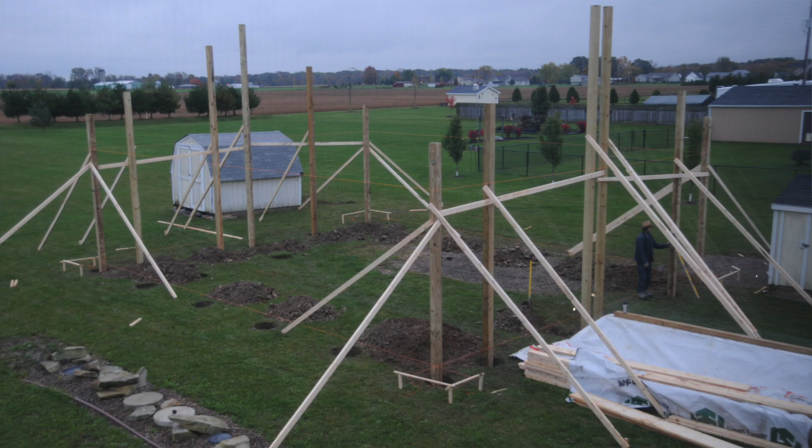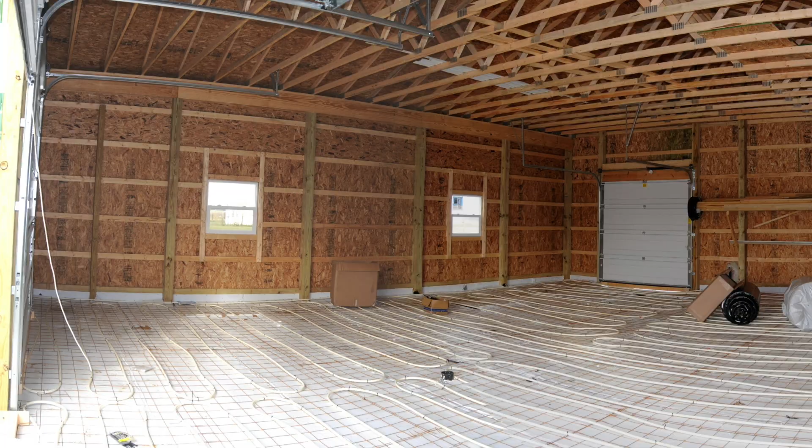I've had a couple of pole barns built over the years. The first one was a 32 by 40 shop, built by the Amish at my old place. It had a heated floor and was dirt cheap. That was back in 2010. I paid just under 15 grand for that building, and after finishing the inside, had about 20 grand in the whole thing total.

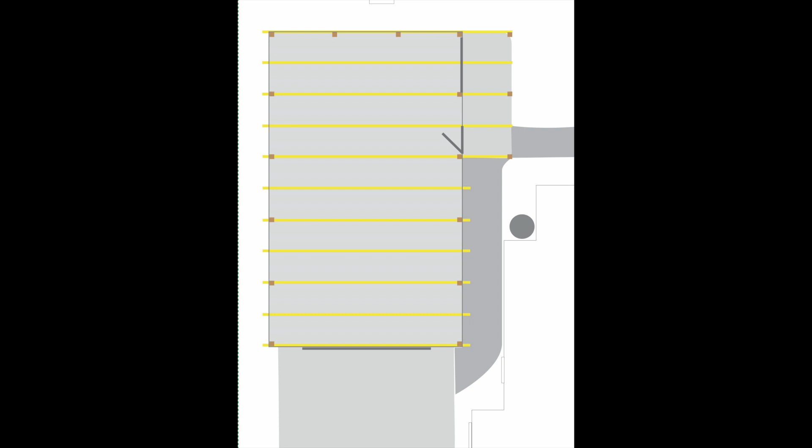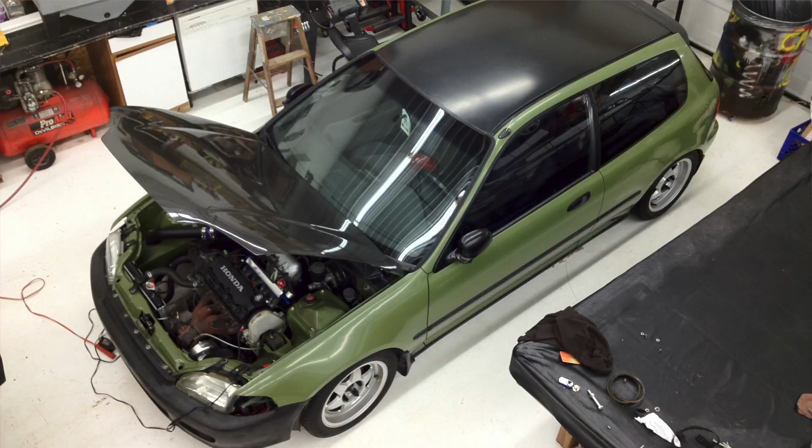I really missed that shop a lot, especially the heated floors. So after moving, I had another 24 by 40 shop built by Burkholder's Custom Construction. They did a great job, but it's more used for storage, as I do all my wrenching in the residential attached garage on the house. So it's unfinished inside. I had that built in 2020, and the total cost on that one was, I think, 26.6K.

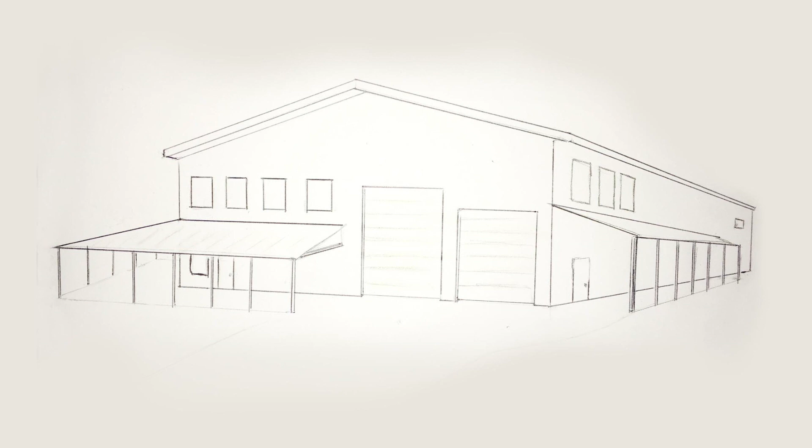I'm really fortunate to have had these buildings built, and I get so much use out of them. But sometimes I still daydream about my third and final shop. My channel is still a small fish in the world of YouTube, but someday I will need more space, and it'd be really nice to have a lift.

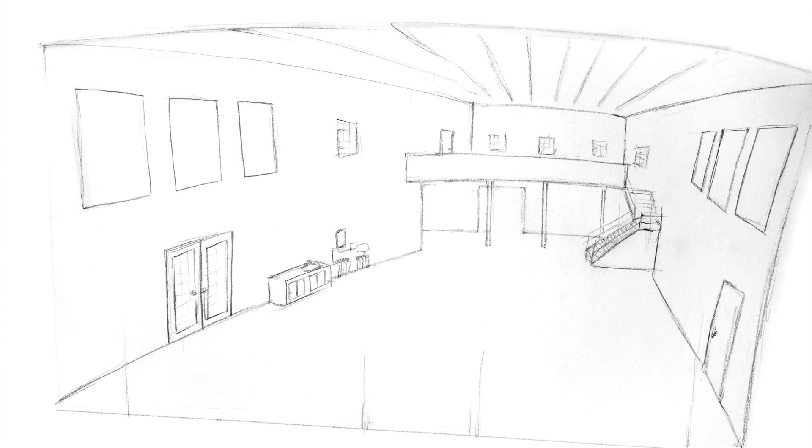So I designed a house shop slash garage condo slash barndominium slash garage house, whatever you want to call it. Basically, half house, half garage. And maybe I could realistically afford it someday, like maybe when I have a million subs or something.

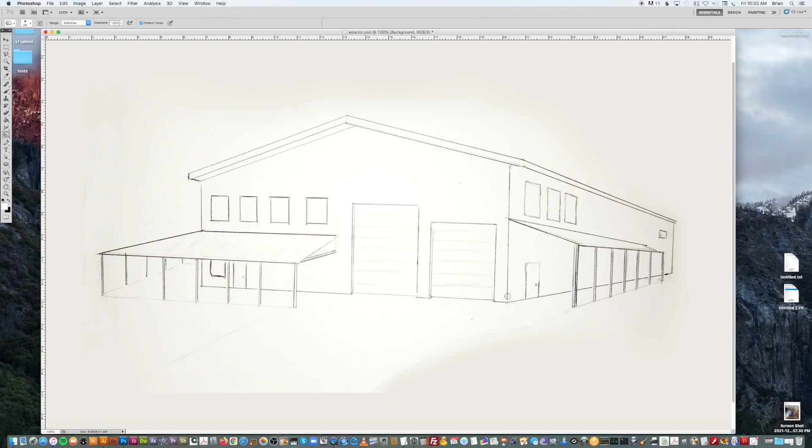So let's start with the exterior. The footprint of the building here is 72 wide by 72 deep, with 16-foot ceilings. The garage half is on the right, and the living space is over here on the left. There's a porch over here, and it's got another side area which doubles as covered parking for one vehicle. And there's a lean-to over on the right side, that's 12 feet wide.

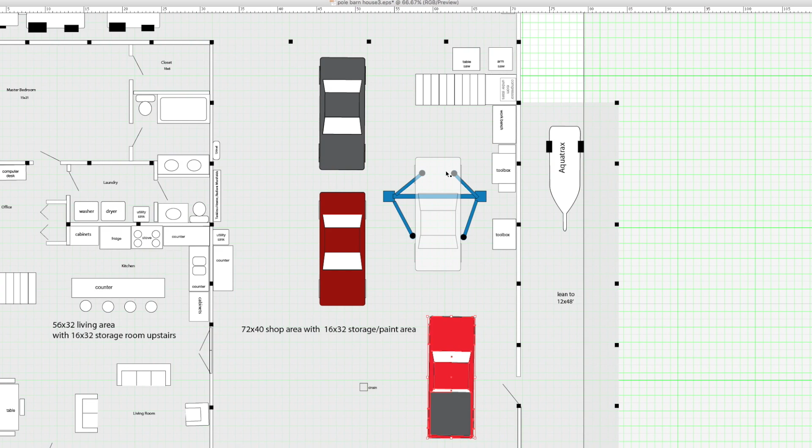Over on the right side, I'm going to have a two-post lift, and this is going to be like my main wrenching area. Over here, I'm just going to have storage for vehicles and other projects. Moving on back here, we have some stairs going up to the loft, which we'll take a look at in a little bit, and this area here is under the loft.

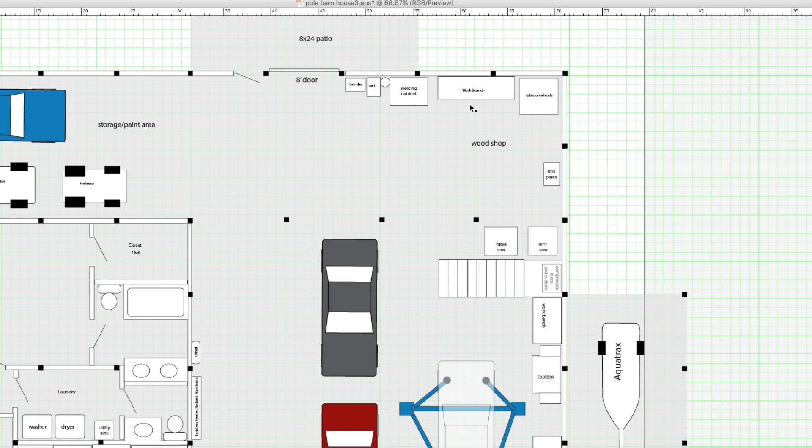Back here, I'm going to have a wood shop area with all of my saws and cutting tools and things like that. This is going to be like the dirty area of the shop. And over here, I've got welding equipment and a metal work area too. Let's get a little closer here.

Next to this area, I have an 8-foot garage door. I've got an 8 by 24-foot concrete patio out back, and I can drag the welding equipment outside, or roll the saws outside and do my really dirty work outside to help keep the garage clean.

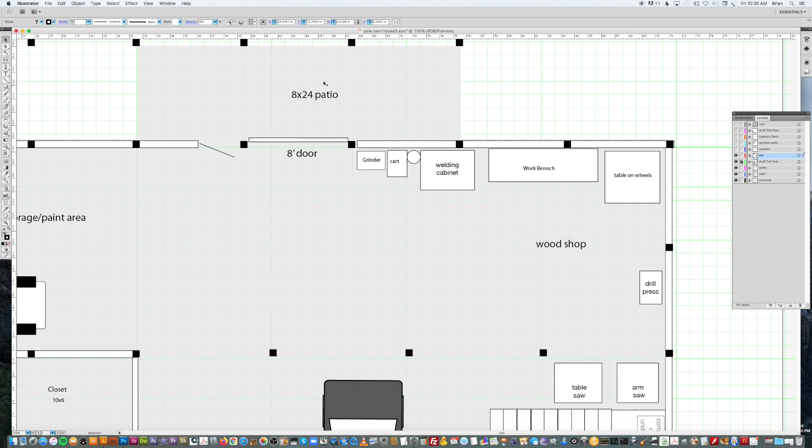Moving on this way, I've got a back area here. This is 16 by 32 feet, and it's mainly going to be used for a storage area, but it could also double as a paint area. I could put a plastic curtain across here to help keep any dust out.

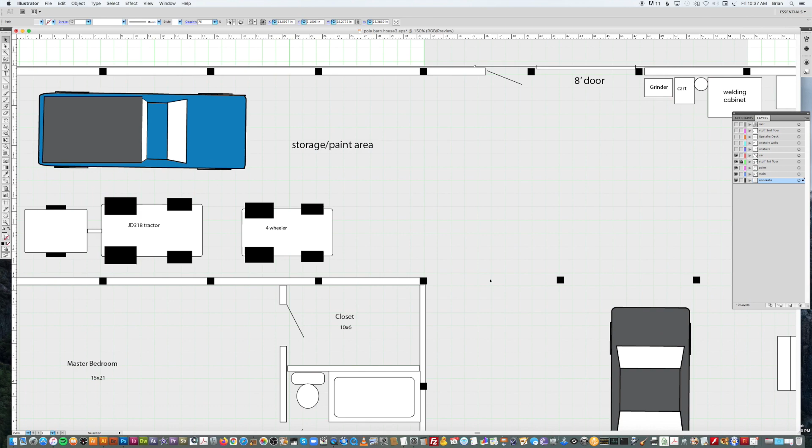So moving on around the corner here in the shop side, mandatory urinal over here on the wall. And here in the middle of the whole building is the tankless water heater and the radiant manifolds.

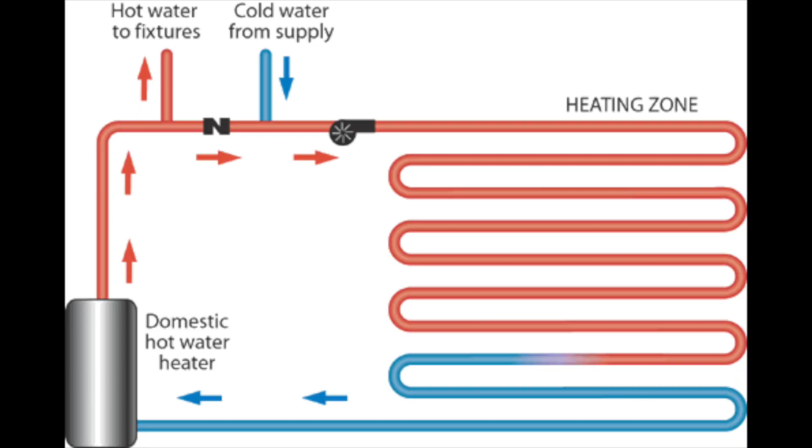I'm definitely going to go with heated floors in this shop like I had in my first building, because they are so efficient. However, in this setup, I would go with an open loop system to heat the floor with tap water instead of the closed loop system like I had before, which uses glycol.

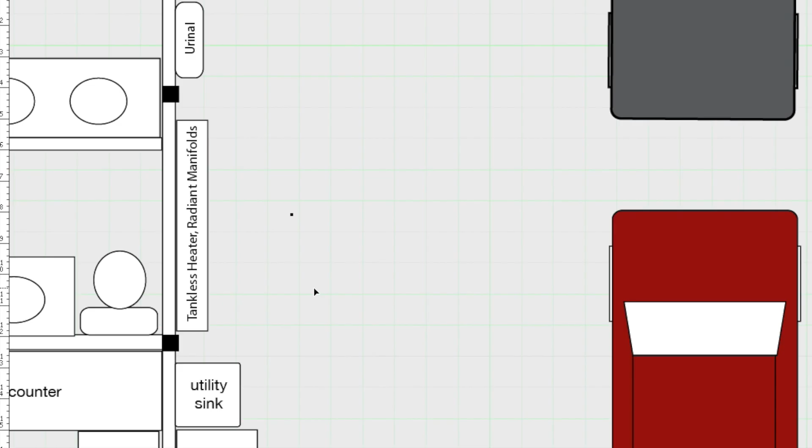My heating bills were so low in that first shop. I heated the house and the shop, and it was maybe over a couple hundred dollars twice. Now just the house I live in has an electric heat pump, and our bills easily reach $600+ in the wintertime for heating. It's ridiculous. So I definitely want the new place to have natural gas and definitely no propane, because that's not much better than the electric heat pump.

This is all in the very center of the entire floor plan, as you can see, and that's going to help with efficiency as well. So let's move on down. I've got a utility sink, a counter here, and I'll probably run a spigot over here so I can wash vehicles indoors over the floor drain.

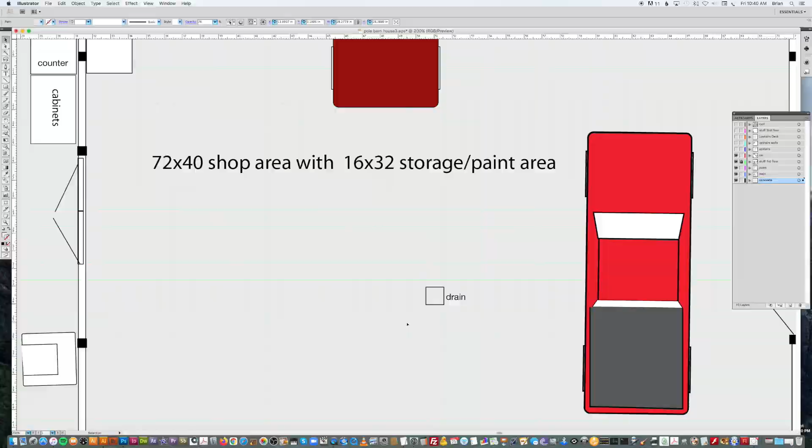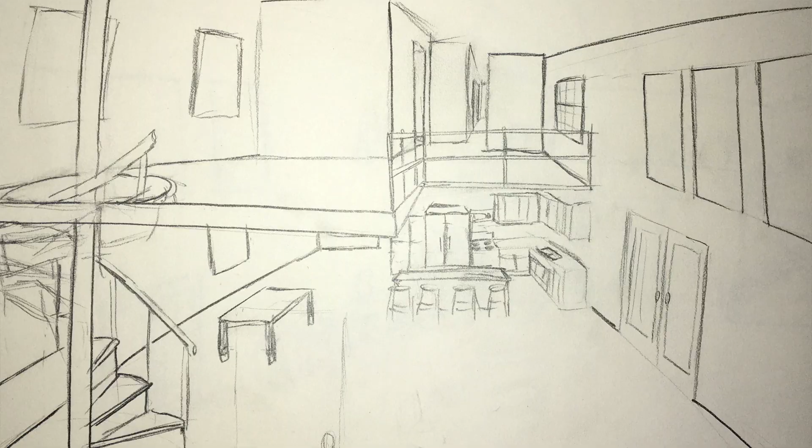Before we go over and look at the living quarters, I just want to say I built this in Adobe Illustrator. It's not at all meant to be used for architectural drawings, and I am definitely not an architect, so if you see something wrong, please let me know. I've made several revisions to this design over the past year and I'm still not 100% final. I've got a couple issues to figure out, and we'll talk about those later in the video.

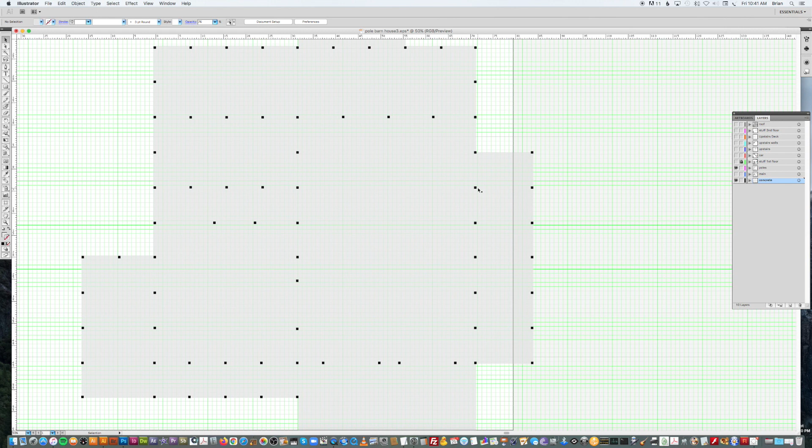By the way, I designed this as a pole barn, and you see these little black squares throughout the place — those are the poles. And here's the concrete pad. These poles are spaced 8 feet apart, and each one is 6 by 6. I have experience designing pole buildings and I've seen a couple built. If it makes more sense to build something like this on a traditional foundation with studded walls, or even a steel building, let me know, because that's not something I have much experience with. So onto the living area.

On the front of the building, you're going to have a big front patio along with an extension on the patio, which can double as a carport. In the middle of winter, I don't want to be opening and closing that big door all the time and letting cold air into the shop, so it would be nice to have some outside parking to help keep the heat inside.

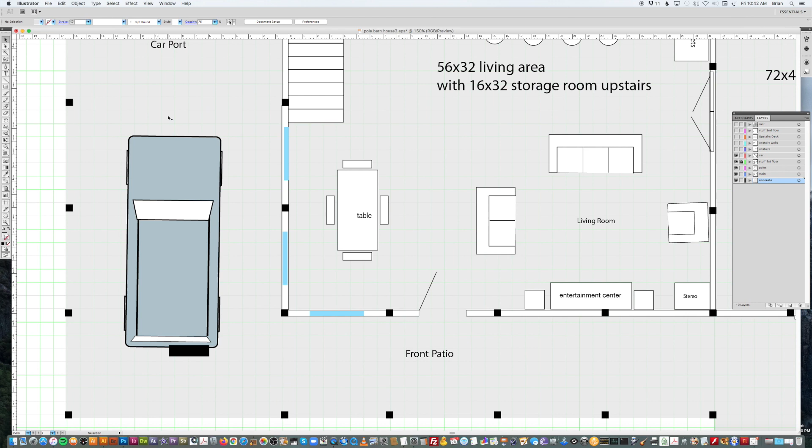Once you enter the front door, you have all these blue things here — these are windows to the outside. Over here on the right is a living area, over here on the left is a dining area, and after the living area is a set of French doors to enter the shop.

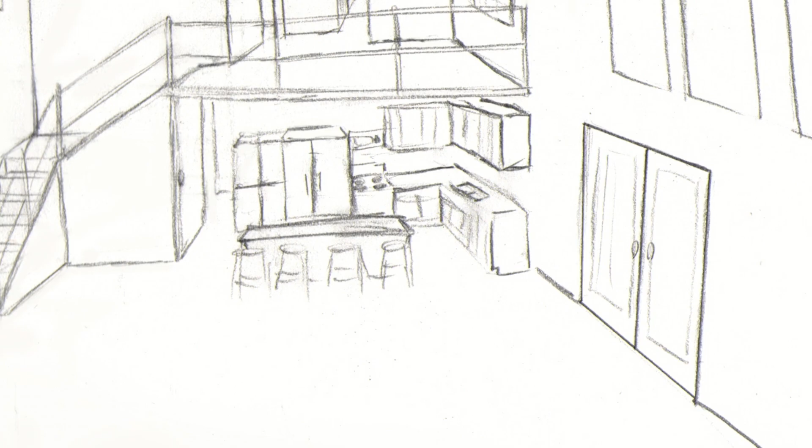Moving on toward the back, we have a kitchen island, and over on this side are stairs that go up to the loft, which we'll take a look at in a minute. Right here underneath the steps, there's going to be a small closet for things like coats and whatnot — just a little bit of storage, going back underneath the steps.

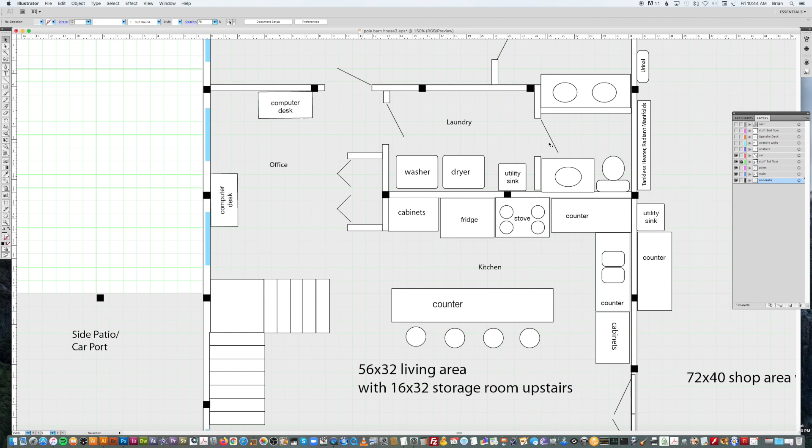Moving on back here, this is going to be a closet, which will probably be used more as a pantry. Over here is going to be my office slash work area, where I'll be doing all my video editing. Across from that, around the pantry, is going to be a laundry room with my utilities and a sink, probably some storage shelving or something like that. And through that is going to be a small half bath.

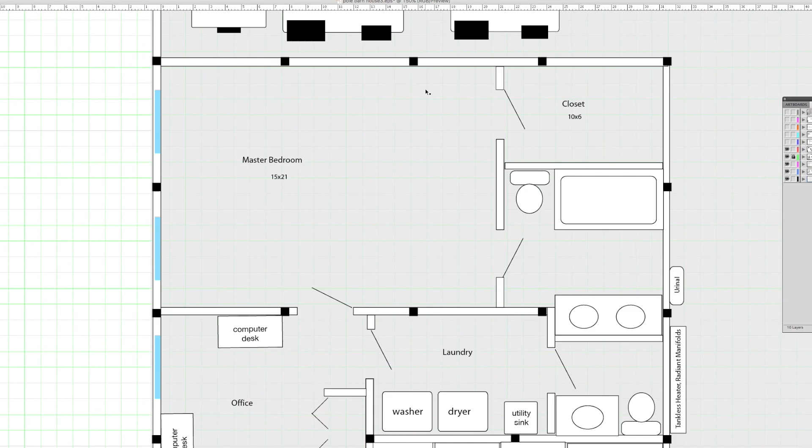Let's move on farther back to the master bedroom. Now this is much larger than I actually wanted, but being a pole barn, all the poles are based on 8 feet, so you kind of have multiples of 8 to work with. The master bedroom is 15 by 21, and on one side there's a full bathroom, and on the other side is a 10 by 6 walk-in closet. Notice everything that's going to use water here is as close as possible to the tankless heater.

That's going to help your hot water get to your washer, dryer, sink, shower, whatever faster than if it were on the other side of the house, and also save on plumbing.

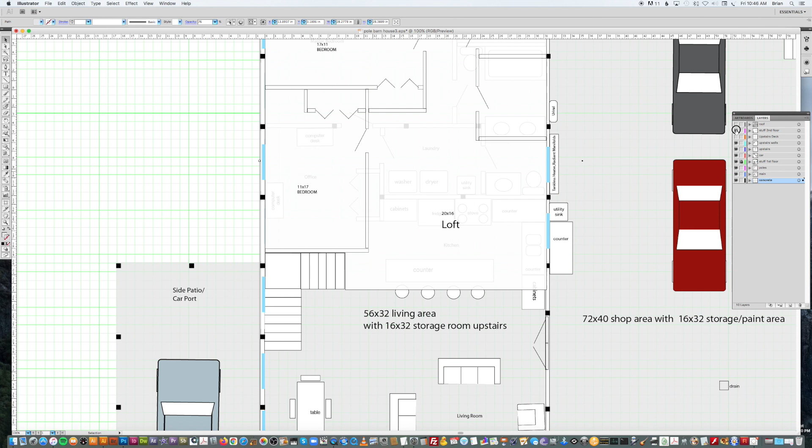Let's zoom out a little bit and turn on the upstairs. Walls, some stuff on the second floor. You go up to the loft here, past the landing on the steps, and upstairs you're going to have a 20 by 16 loft, just a big open area. I think it'd be cool to have a couple windows looking down into the shop — makes for some nice viewing angles for videos.

The first bedroom is not quite 11 by 17 because I had to cut some out for a closet. So there's a first bedroom, and around the corner is another bedroom, a true 11 by 17 with the closet on the outside. Across from that is a full bathroom.

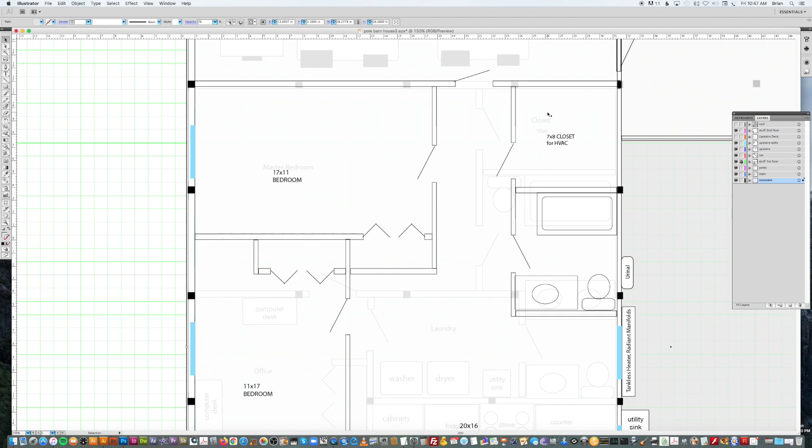Next to that I've got a 7 by 8 closet, which I sectioned off for HVAC purposes. There's definitely going to need to be some air conditioning because Ohio summers get pretty hot. I'm also not sure, but I may need some sort of heat setup for the second floor in winter — not sure if just the radiant heat from the first floor will be enough. I need to do more research on that, so if you have any thoughts, let me know.

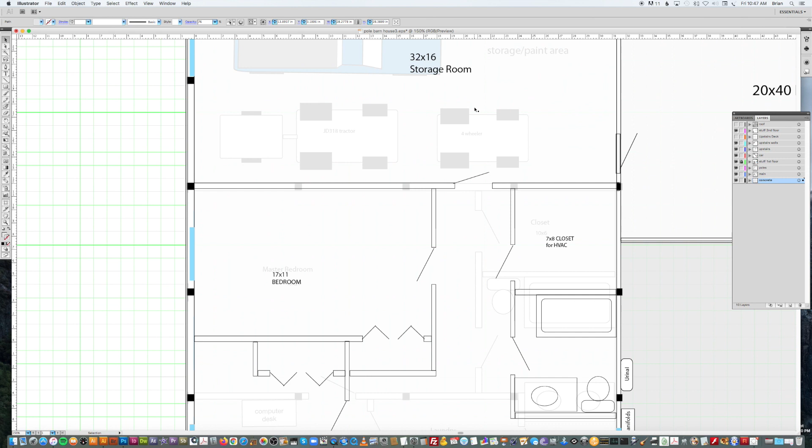Going through this door at the end of the hallway is a giant 32 by 16 storage room. Since this garage shop house has no basement, I have nowhere to put my photo studio, all my Toyota parts, or all my wheels.

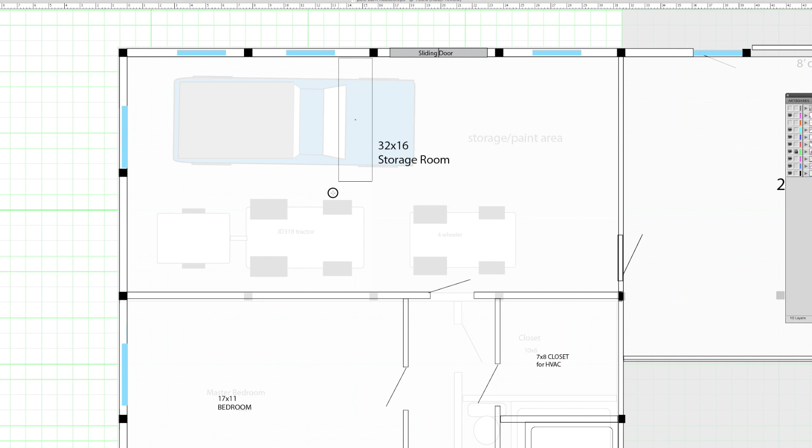So I just need a giant room to make up for not having a basement. A room this large could also be converted into two additional bedrooms — say you put in a hallway right here, with one bedroom here and another over here. Because I'm going to have my HVAC right here, I could easily run ductwork through here into these additional rooms. And this door here leads over to the shop loft.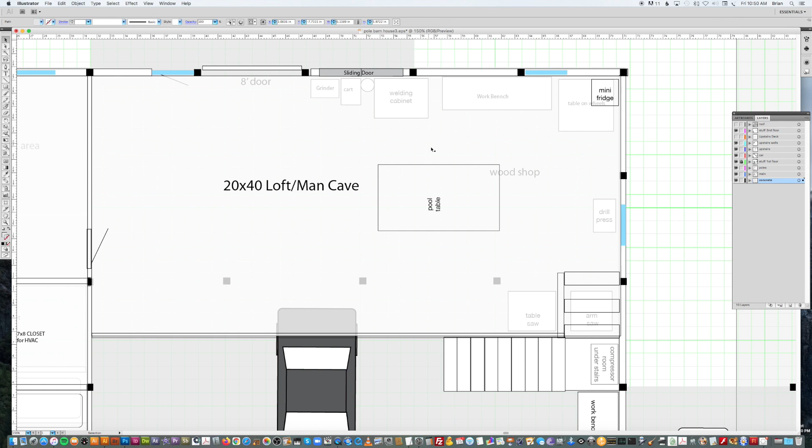Let's go check out the man cave. This is going to be the 20 by 40 loft that the stairs lead up to. Up here I'll have a pool table — I really missed having one — plus a fridge, probably a bar, just a chill area.

Oh, I forgot about the deck. Let me zoom out and turn on the deck. Outside, out back here, there will be a 10 by 42 foot deck over that patio. And over here I'm going to have a sliding door to get to the deck from the man cave as well as from the storage room.

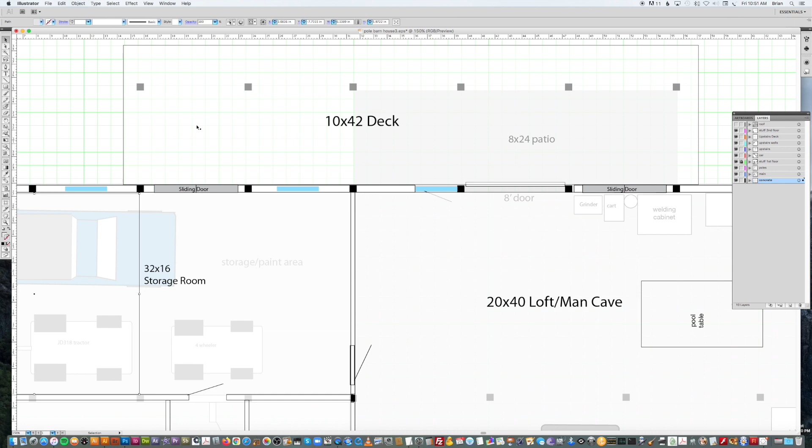Getting back to this loft in the shop — the loft slash man cave could also be heated and cooled because I'm going to have my HVAC closet right here. I could easily run ductwork through the wall to heat and cool this entire area. Of course, that would mean separating it from the rest of the shop, which I could do with a whole row of windows to keep it feeling open and airy, and even a glass door over here.

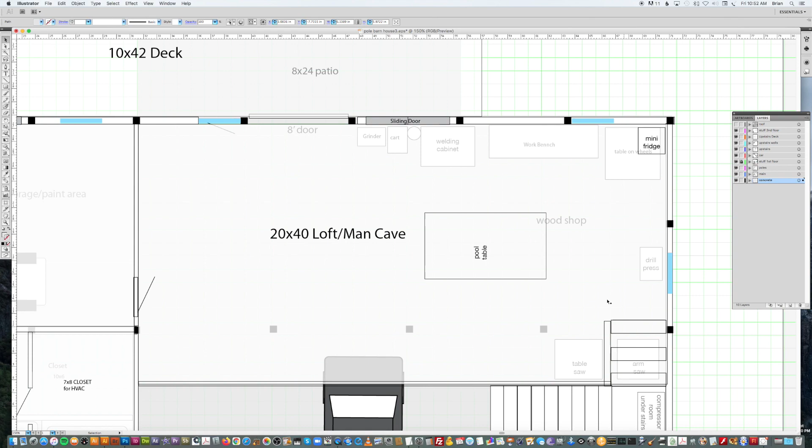But that could be down the road. I think it's going to be hot up at the top of the shop — there'll probably be a lot of heat up there, and I don't know if just having windows open would be enough to keep it cool.

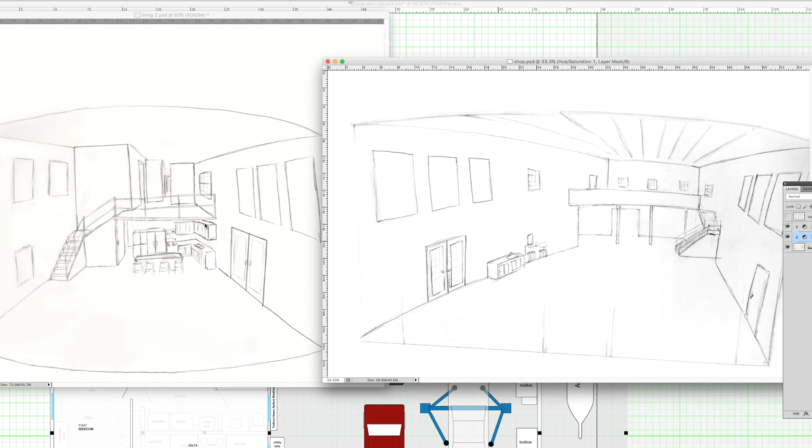So I mentioned earlier I had a couple small issues with the layout I haven't figured out yet. The first one, the biggest I think, was the upstairs ceiling height. I assumed with 16-foot ceilings each level would be 8 feet, but I didn't account for the floor joists, which might be about a foot thick, leaving me with 7 feet upstairs. That's a pretty low ceiling, and I like high ceilings.

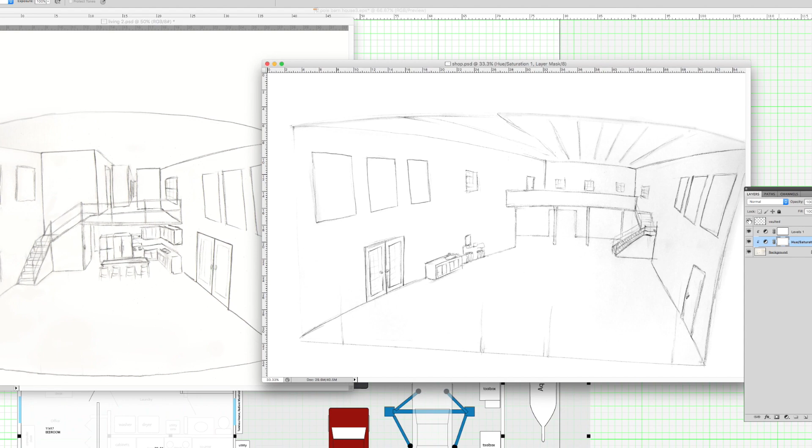So what I could do is use a scissor truss, and that would give me a vaulted ceiling. So something on the shop side would look more like this, which would give me a lot more room up in the loft. I could even extend some of these windows going between the shop and the house and make those taller. By the way, these aren't designed to open, they're just to let light through. But I definitely want this window to open so I can set up a camera and see down through.

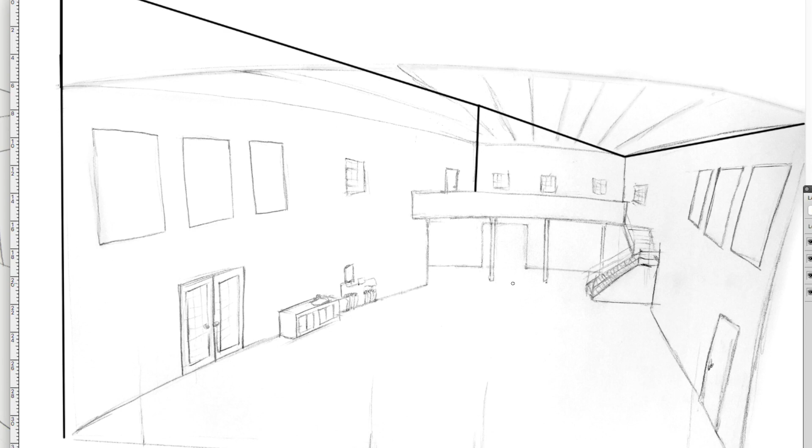But over on the living side, that would look more like this. By the way, I tried to draw these with a fisheye view to get more perspective. This is all done freehand. Like I said, there's no software here, so it may not be to scale.

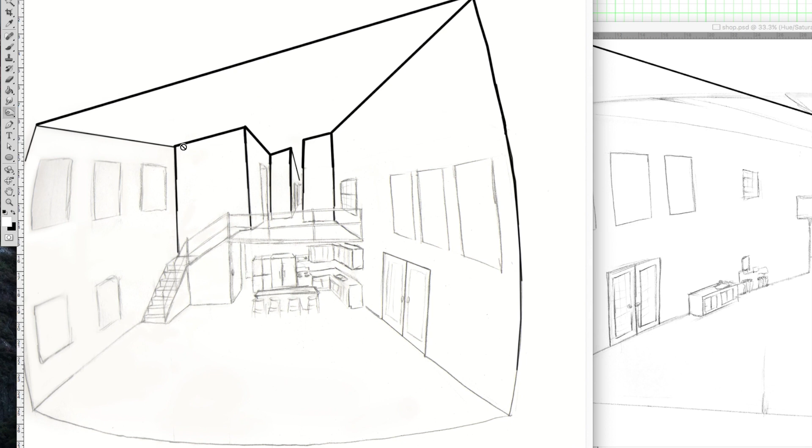But I think that a tall ceiling is going to solve that issue. Yeah, you're going to have 7 feet over here, but that's not a huge issue because it's just one small area in those bedrooms. You'll have 7 feet right here walking up, but after that, it won't feel so claustrophobic. Plus, with all that additional ceiling height, that will leave room for some ductwork.

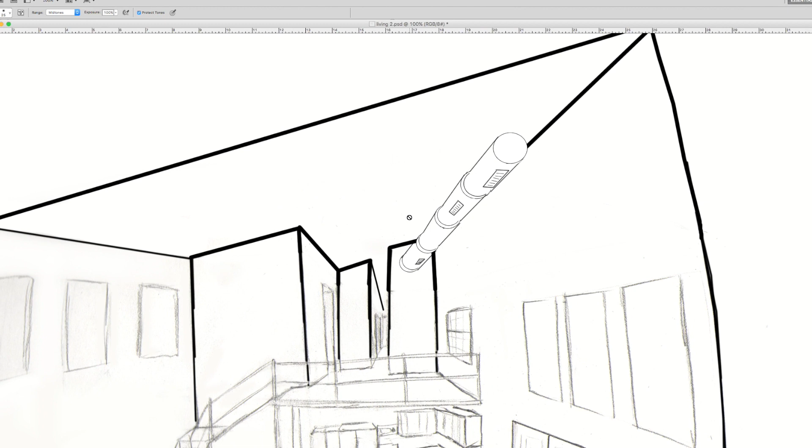Let's zoom in here. If you look at the ceilings in a lot of restaurants and bars, they have these big industrial tubes coming through to help cool, and they start bigger and shrink down smaller and smaller as they go out. I think that'd be kind of cool. I'm kind of going for a contemporary feel inside the place, maybe a little industrial, but I think that would be sufficient to cool this whole downstairs area on a hot day.

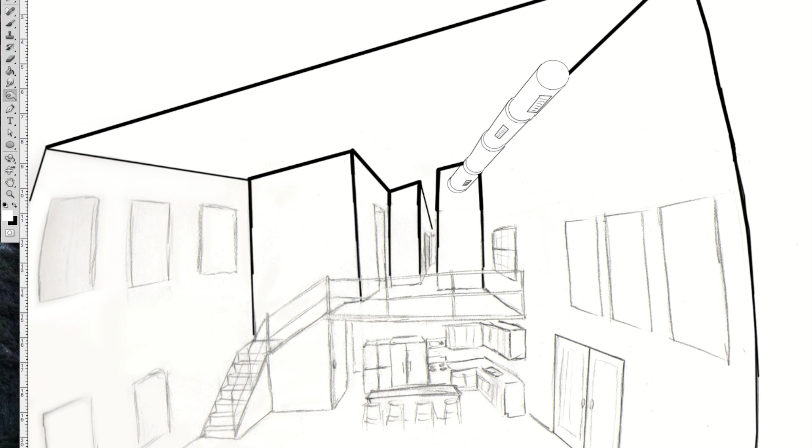And of course, there's always plenty of room to put one of those big ass fans in the ceiling, because I've always liked those too.

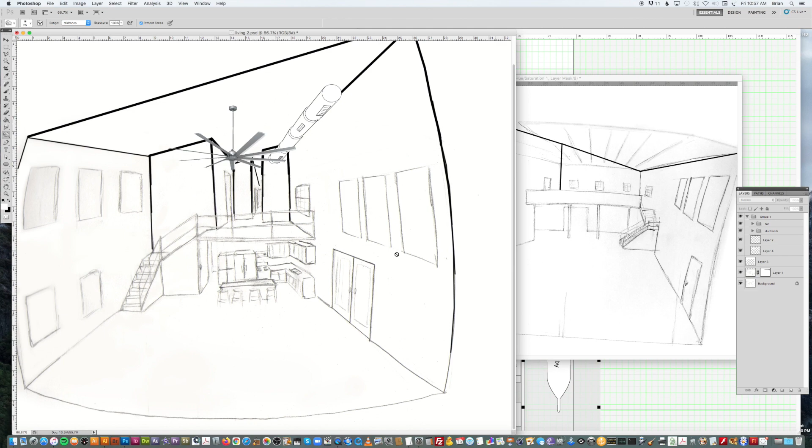So my only other concern is going to be the lack of natural light, especially in the living space. As you can see, I've got a lot of walls over here, and there's no windows that are going to bring in sunlight from this whole side of the house. Everything's going to come in this side or some from the front, none from the back because I've got that storage room and the paint booth on the downstairs wall.

So I'm only going to have windows coming in from this side. And these aren't going to get a lot of light either, as well as this one, because they're going to be blocked by the porch. So I'm really depending on these upstairs windows over here and here to let in additional light. I just hope that it would be enough light. So let me know your thoughts on that.

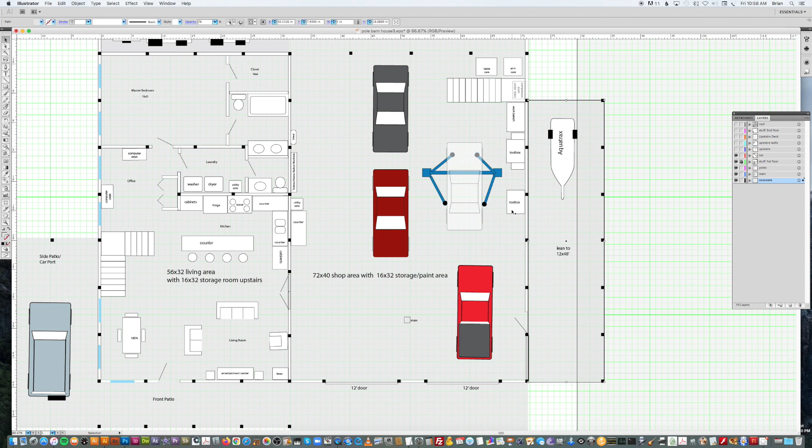The only other issue I have is the lack of a mudroom. Most houses that I've lived in have the laundry room located near the back door from the garage, which is perfect because you come in and take off your dirty clothes, dirty boots, whatever. Here, you walk right in and you're in your kitchen and living room. So, yeah, I guess the shop could be a giant mudroom, but it'd be nice to have something like that in here.

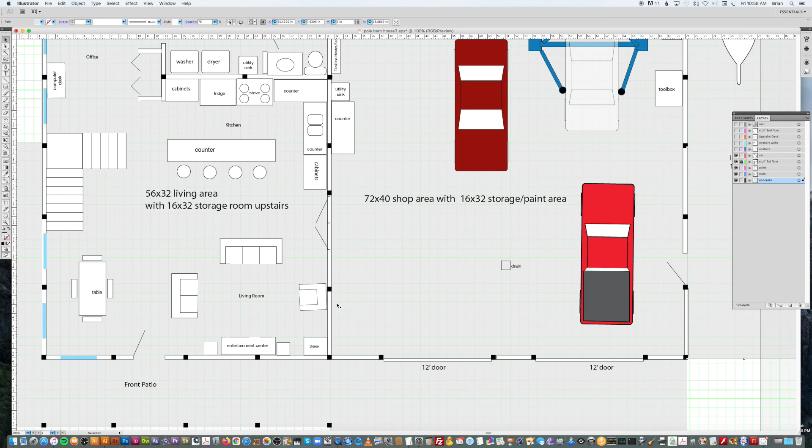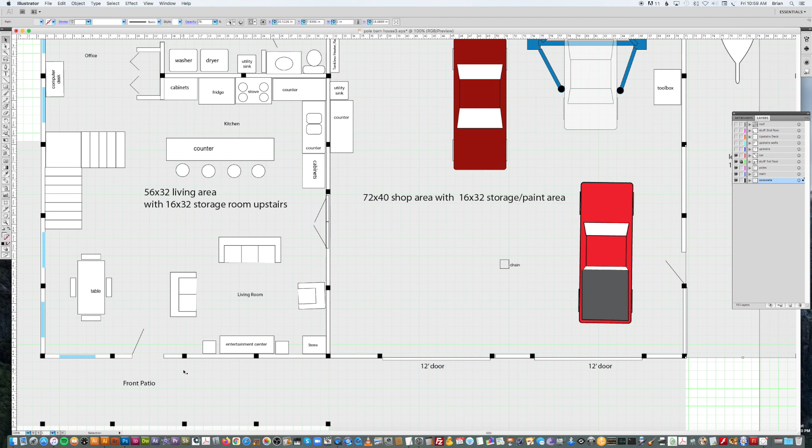Same with the front door. You walk right in, you've got your dining area, your living room, nowhere really to put dirty boots or even coats. I've got no coat closet. The nearest closet is over here. So I don't really want to block anything here by building in a closet because I really need those windows for the light. So if you have any ideas for solutions to those minor issues, please let me know in the comments.

I'll continue to refine this as I iron out all of the details. I've got plenty of time because I'm a long ways away from having the amount of subs I need to afford a place like this. And this isn't really a pole barn channel, it's more of a DIY automotive channel.